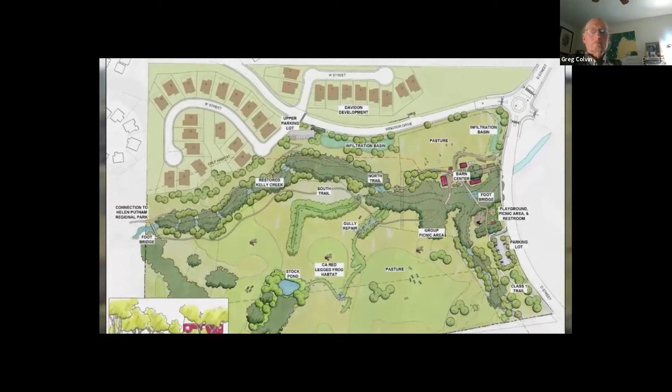I think we're ready. I think we'll just go on the tour, and a lot of things will be pointed out that will, I'm sure, answer questions you have about what this is going to look like once it's developed as a park. Clusters of 18 homes on one side of the road and 10 homes on the other. So come along with us.

Okay, so real quick, before we walk, I want to give you a lay of the land. We're at the barn complex right here. Basically the 44 acres that will be the Kelly Creek Protection Project property, dedicated and expanded to Putnam Park, is all this land you see here.

We're going to walk up to where the homes are and where the streets will be, and show you how far things are set back from the creek and from the street. There's been a lot of changes here, not only to the density of the project, reducing the homes from originally 93 to 66 and 63 homes, now down to 28 homes, which is the absolute minimum allowable number of homes on the property.

Only 9.5 acres of the entire 59-acre project will be developed. That's only 16% of the property, and the remaining 84% will remain as permanent open space, with 44 acres of permanent public accessible park with the expansion of Putnam Park.

This is a small hay barn. It's lifted up off the ground, and it's sort of secondary to the big red barn over here, which is the major cattle barn.

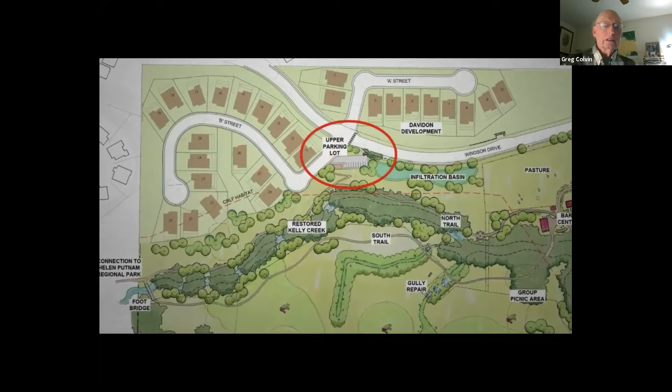So where we're standing right now will be the upper parking lot for the Kelly Creek extension of Putnam Park. This stake back here shows where the road will be coming in that will serve that parking lot with 10 spaces, and also serve the houses on the upper part of this hillside behind us. And looking that way, you can see the orange stakes we've put in the ground.

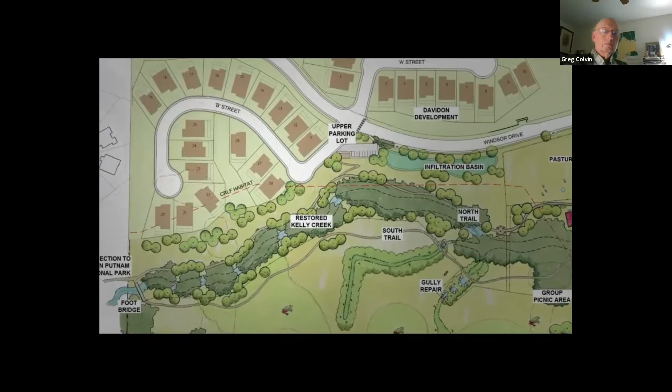That's the rear fences of the homes that will be backing to the creek. So that first stake you see is the front corner of lot 28, where it connects to the street, and the one further back is the back corner of lot 28. Then we've got more stakes that wrap around the corner there.

In negotiations with Greg, working on this land plan, the previous iteration had homes 50 feet closer to the creek. Now the homes are set back at a minimum of 119 feet from the center line of the creek to the fence lines, where before it was 62 feet.

The U.S. Fish and Wildlife Service has marked this area, the creek and everything to the south, as habitat for the frog. The frog lives in the creek, in this gully over here, and also in the stock pond up above, which we'll go to. The public, when the extension of the park is open and trails are put in, will be able to walk here, but will not be able to walk up into that area, because we want to protect it for the frog and for nature only.

So we do have plans to restore this gully. We'd keep cattle out of it while all the plants are growing—sedges, rushes, willow. Once we help restore the gully, we keep sediment loads out of the creek, and another benefit is the groundwater table gets a little closer to the surface, which helps with all the flora, and the cows will like it too, because the grass will be better to eat. So there's a lot of benefits to restoring the gully.

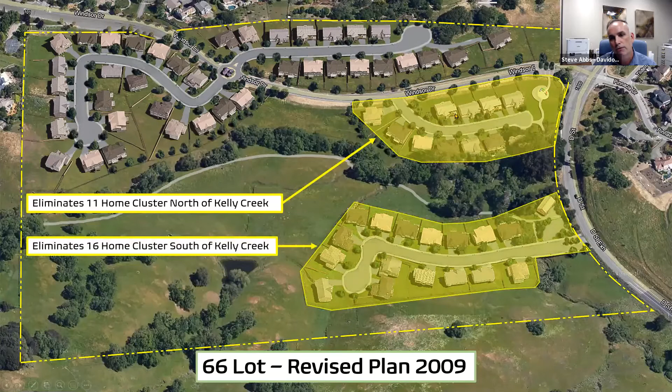So what we did first off was we removed these two clusters of homes south of Windsor Drive. Those got axed immediately. And here's a comparison: I've got the 66 lot plan up above and the 28 lot plan below.

The next thing is the homes north of Windsor. We changed it from 16 homes with a double loaded street to only 10 homes north of Windsor Drive. Over on this northwest corner, it converted 23 homes to 18 homes.

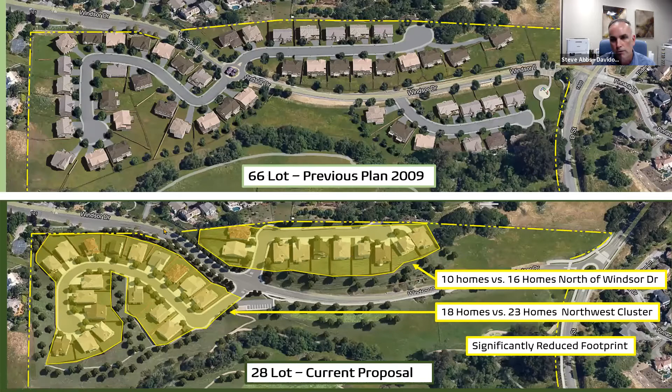And you can see the difference. We had double loaded streets with homes backing into Oxford Court, homes backing into Kelly Creek. Those have been eliminated with open space parcels. So this is the 28 lot plan that we came up with.

25% of the property is the residential application by Davidon Homes, and the remaining 75% is the application by KCPP for the park extension.

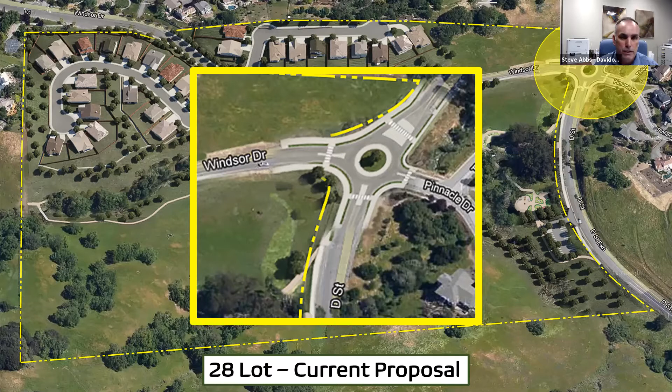As part of the residential application, we're also proposing a roundabout at Windsor and D Street. This is an improvement that's not required, it's not a mitigation measure of the project. It's a public benefit we're offering, but it will significantly improve not only the traffic flow, but the safety at that intersection.

So back to the comparison between the two. In addition to the density reduction, we also made some additional changes. One being we reduced the house size. Before we had an average of 4,000 square foot houses; we reduced that down to an average of less than 3,000 square feet on the new proposal.

In addition, we had no single story homes on the previous plan. Now 75% of the homes will be single story. So we not only reduced the footprint of the homes, we also reduced the verticality, which really reduces the overall visual impact of the project.

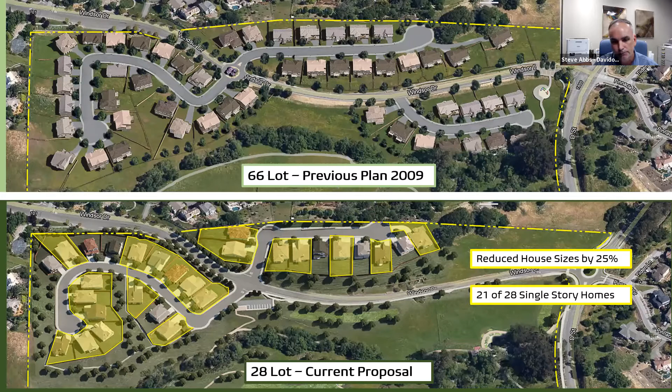Then also, and more importantly I think, we implemented a lot of permanent open space in and around the residential project. So you can see the difference between the two — there's now a huge buffer between D Street here, where before there were homes almost extending to D Street.

Also, along here there was an existing fence line, but with the 66 lot plan the proposed fence line went all the way down to the street level, and the same with these lots. These two-story homes were downslope homes, basically hovering over Windsor Drive. As you drove down Windsor Drive you'd be inundated with these massive homes looming over it. That's all changed now.

We have a massive setback from Windsor Drive now, with a landscaped slope and a fence at the top of the hill. We also implemented an open space area between the neighbors to the north, and another open space area to the Oxford Court neighbors. You can see that we had homes there before. We put an open space area in between the homes, allowing the trees to be permanently maintained and eventually grow, creating a softer viewscape. Finally, we increased the creek setback by an additional 40 to 50 feet.

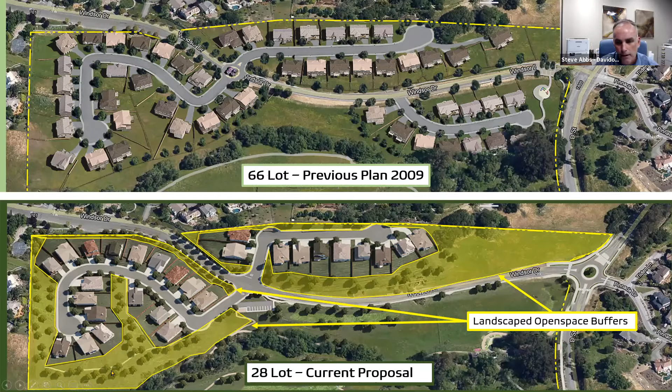Also, one of the things Greg really wanted to implement was making sure the wildlife corridors were maintained, so there's the ability for wildlife to continue. There are gaps in the fence so the wildlife can continue to wander the property.

So now I want to walk you through a three-dimensional look at all those changes. I've got this 3D animation that shows the 66-lot application on the left versus the 28-lot current application on the right.

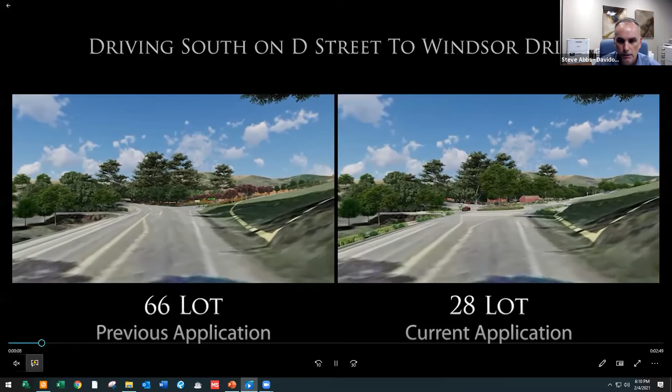As we approach Windsor Drive, there's the new roundabout, which we didn't have before. You can see the barn structures, and everything on the left as we turn is all open space versus the homes you'll see on the left in the previous application.

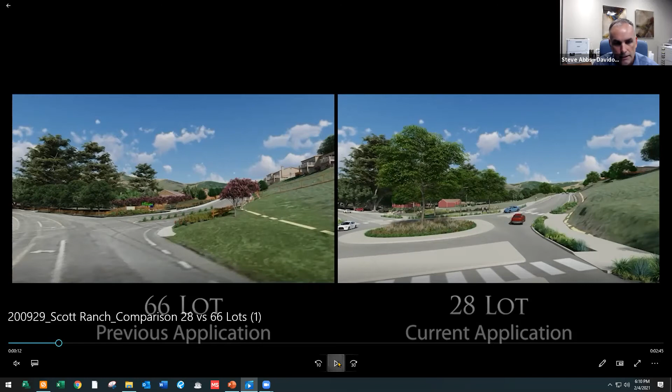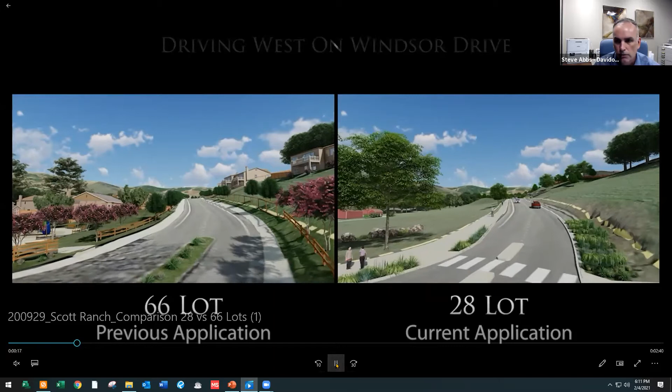As you turn the corner, you can see the homes on the left in the 66-lot plan—immediately you're inundated by these massive two-story split homes. Notice the rear yard fences following the roadway, versus the big open space parcel now along Windsor Drive.

Again, this is all going to remain permanent open space. The fence line is way at the top here on the right, and with the setback of the homes so far back, you might only be able to see the roof lines. As you drive along Windsor, we're going to have some park benches overlooking the park.

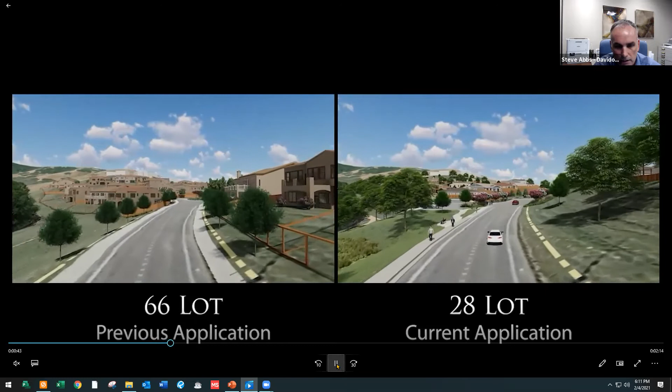As we stop right here, you can see the difference—on the left, the 66-lot plan was basically a wall of homes as you approached that northwest cluster, versus what you see on the right with all single-story homes and landscape buffers. It really softened up the viewscape.

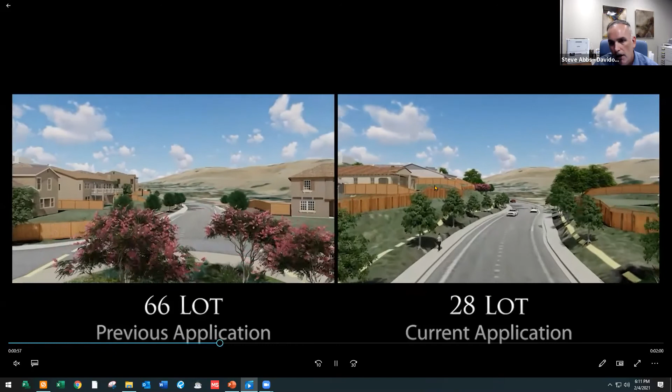There's a roundabout that we did eliminate, but as you approach Windsor Drive here, you can see the landscape buffer between the fence line and the street, versus the rear yards coming completely down to the street there.

So real quick, this is Oxford Court up here—you can see the homes that were backing into it have been eliminated. All these upper homes are now single-story homes, again to really reduce that view shed impact.

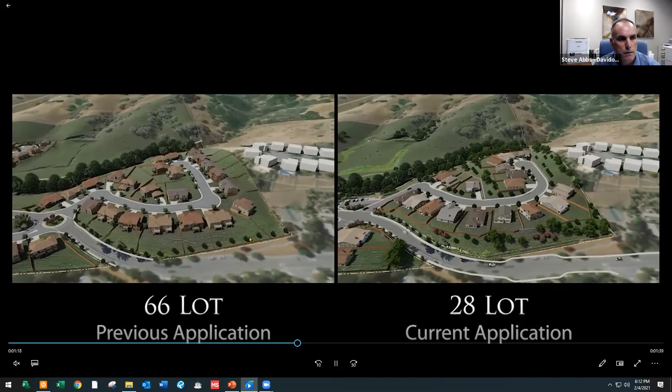We're going to pan out to the entire project here, and you'll start seeing the two clusters of homes that were eliminated—now they're completely gone. Also notice the double-loaded street here versus what we're proposing now.

So this is flying from Helen Putnam west now. Notice there's a trail on both sides of the creek—before there was only one. There are trees and a big setback from the creek with a lot of landscape trees.

The two-story split homes versus the single-story homes—again, notice the big setback from Windsor Drive here versus here. And again, just the elimination of the homes, huge.

Part of the elimination also preserved an additional 110 trees with this change, a significant reduction in tree removal.

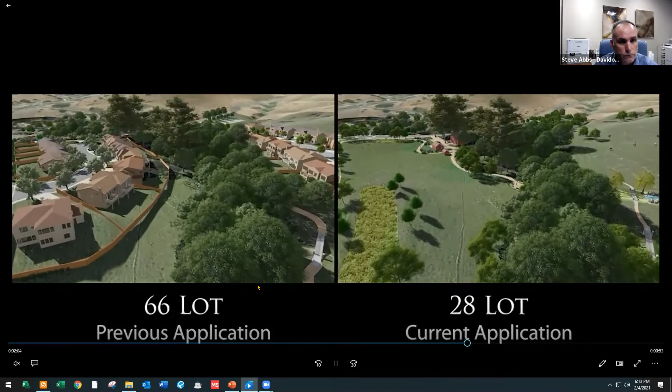As we fly closer here, you'll see that on the previous plan we had the barn being relocated. Now we have the trail system, which Maggie will go into a little deeper, plus the tot lot and staging area for the creek, and the parking lot.

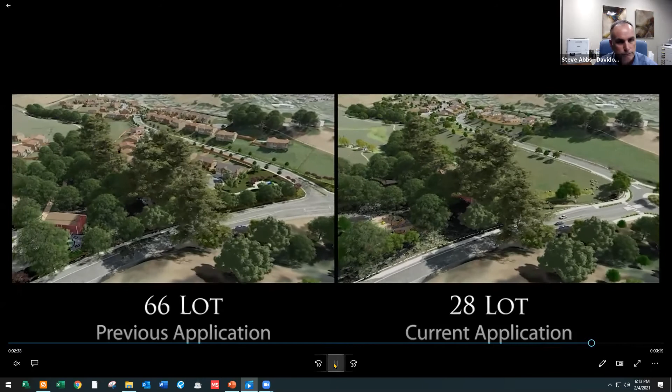Then we'll zoom back around here, and you'll kind of see the overall view from this angle. Again, you'll see the huge difference, obviously in the elimination of those homes, but even what we're proposing has a much smaller footprint all the way around.

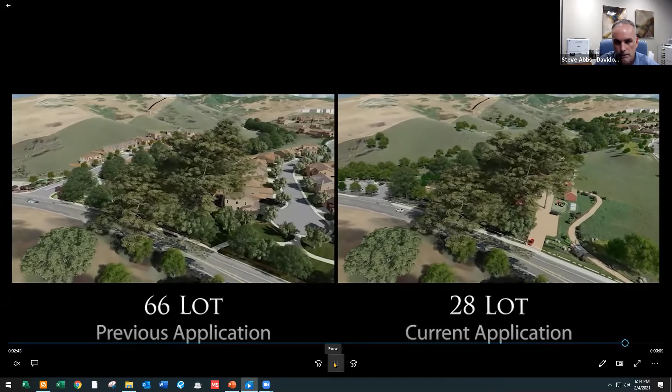So again, all that was part of listening to the community, listening to you, and Greg had this vision to make it happen. So with that said, we'll end there on the barns, and I'll stop sharing and turn it over to Maggie Jensen.

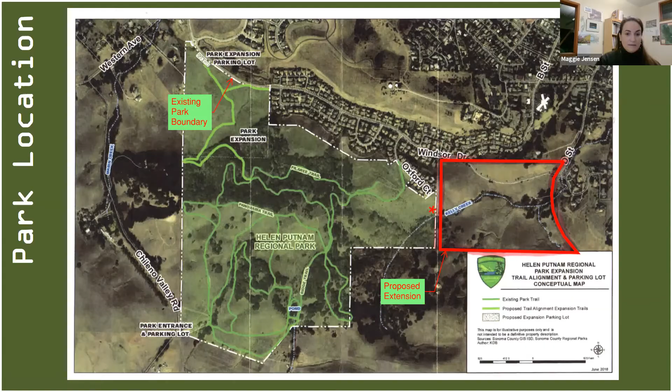One important point is much of the park will be left grazed by livestock, allowing the pastoral views of these red barns and grassy hills to be maintained and serve as a gateway to the city of Petaluma.

This zoomed in view of the park has three main access points. We've previously reviewed this small upper lot on Windsor, which has room for 10 spaces. There's a larger lot down here on D Street, with room for 27 cars. And there's an existing driveway at the Red Barns that will be used primarily for buses, service vehicles, and emergency vehicle access.

In terms of pedestrian and bicycle access, there's a proposed Class 1 trail that runs north-south along D Street. It sweeps into the park and then back out along D Street for bicycles and pedestrians. There's also a sidewalk along Windsor Drive with crosswalks shown for safe access to the park.

Importantly, Kelly Creek runs west to east through the center of the park site. The first phase of the park design will be the lower 27 space lot, the footbridge to the barn center, shown here, with an inset on the lower left of what that would look like in elevation, and the connector trail to Putnam, which lies north of Kelly Creek. That would be phase 1 implementation.

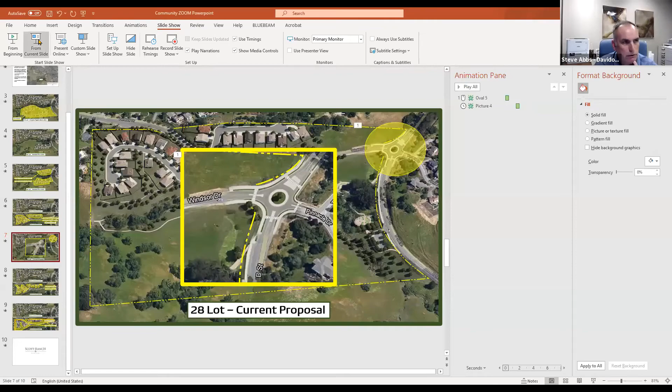So the urban - sorry about that - this line here, can you see this? This line here is actually the city boundary. Our property is on the city boundary. So the urban growth boundary line, setback line, is a 300-foot setback here. So again, city limits, the urban limit line, and then there's a 300-foot setback that basically runs along this line here, if you guys can see that.

Hope that's clear. Steve, I've been pointed out that we didn't really address the question about what could happen if Davidon doesn't pass. So I guess the question's getting at, what if this project doesn't receive entitlements? What happens to the property, if I'm understanding correctly?

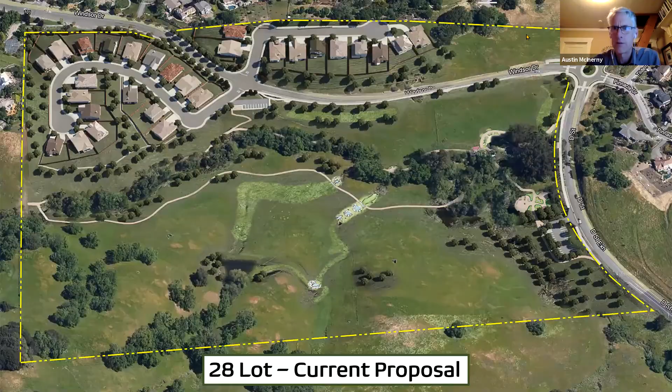Go ahead, Greg. Sure. Austin, I've been making a list because a neighbor of mine asked me that question several weeks ago, and it really caused me to think about how to list and describe what's at stake here. The last two of my slides do cover some of those main points. I don't know if you can bring that up, Austin.

Sure, if you give me one sec. I'm just going to talk through what some of them are, and you can put it up when you can.

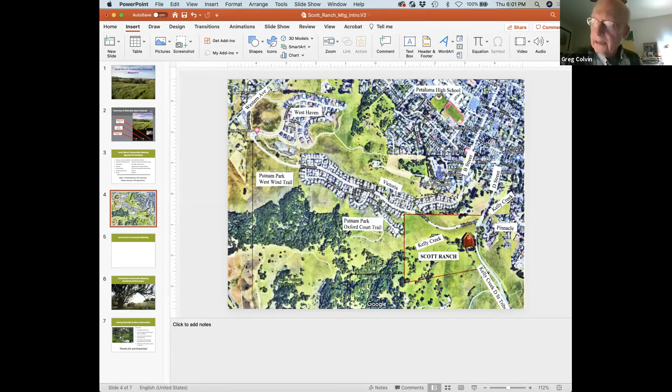The extension of Putnam Park is not a given. We first have to acquire that property at Kelly Creek Protection Project and then transfer it to Sonoma County Regional Park. So it really is available to everyone, not like an HOA park that's only available to residents. That's the first thing that's at stake, to be able to get that extension. We've had tremendously good relationships with the planning department at Sonoma County Regional Park, so the proximity already between the ranch and Putnam Park makes it a natural fit.

But just because more and more open space has been protected every time we've returned to the Scott Ranch over the last 15 years, doesn't mean it would become part of Putnam Park. It could be, as it is in Marin and a number of other areas close to regional or county parks or city parks, just a sort of private trail that people can use, but the land is not professionally managed by regional parks.

And regional parks has huge professional experience with endangered species, with fire protection, and with the parking issue, which I know is going to come up. So here are 8 issues right now - these are things that you wouldn't have if this doesn't go through. We're not going to resolve the parking issues on Windsor, which on any given day has 25 to 50 or more people parking on the street because there are no parking lots connected to this side of Helen Putnam Park.

The roundabout at Windsor and D Street will raise the level of service from an F to a B, as measured by one of the traffic measurements. We need safe crosswalks and continuous sidewalks down D Street, since this is within a 20-minute walk from the post office, to make it possible to safely walk up from many parts of the west side of Petaluma instead of having to drive to Putnam Park.

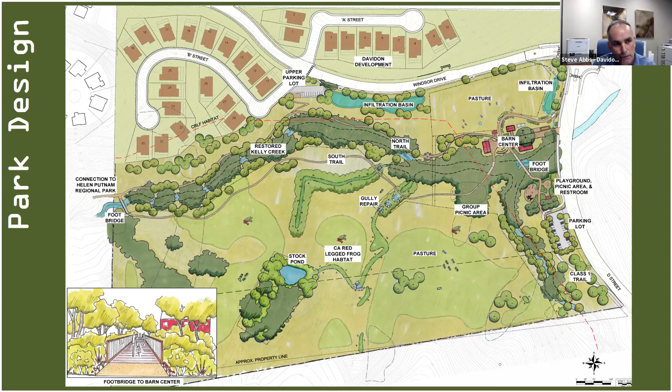A design question for Steve: how will the hillside of the homes backing up to Oxford Circle be graded? Will the roof lines of the new homes be below the height of the Oxford Circle homes? I don't have the exact height of how far below their backyard pads are, but it's significant, as you saw in those three-dimensional views. From the previous 66 lot plan, this new plan has actually lowered the roof line by 17 feet. So those Oxford homes' spectacular views will not be hindered whatsoever by this development.

Okay, last two questions before we wrap up. Who will pay for the barn and park building maintenance - is that county parks in the long run? Greg, for maintenance?

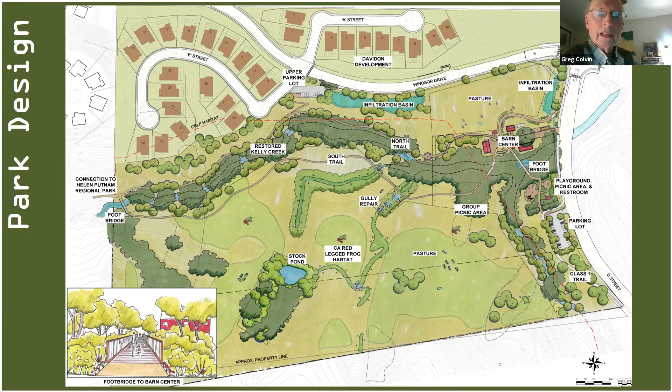I just got a text from Bert Whitaker, who's the head of regional parks - he says we love horses. But to correct any misunderstanding: we're going to transition to Sonoma County Regional Parks for the rehabilitation and protection of the barns. It's going to cost a lot to rehabilitate, especially the big barn - putting a new foundation on it and giving it structural reinforcement. We paid $17,000 two years ago for Henrys Roofing to put on temporary roofing to keep it from leaking, and that's started to blow off a bit. What we're going to do is get started on phase 1 improvements to the park, then work with regional parks to use county resources to fulfill the dream of what this park can be.

Well, thanks for that. I want to respect everyone's evening - it's 7 o'clock now, which is when we were scheduled to end. So I want to turn to closing remarks and what happens going forward. There were a couple of questions that just came in last minute that we won't be able to address tonight, but I'm told these will be reviewed and additional responses prepared and posted to the website.

That's extendputnampark.org - I've just posted this into the chat box, along with the link to the City of Petaluma Scott Ranch site. That's where you should go if you have specific comments you want considered as part of the environmental review the city is doing. And if you have additional questions or want more info, you're welcome to email directly to info@extendputnampark.org.